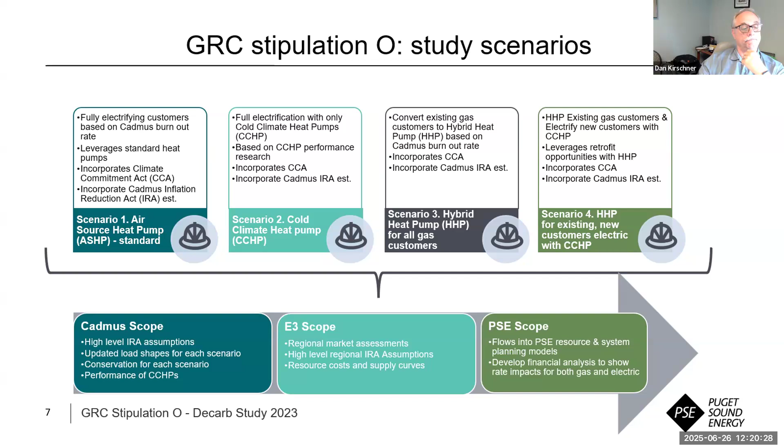Okay, I'm going to go to the next slide. There we go. For those of us that may be more in tune with an integrated resource planning process, the slide is a little helpful just to show how all these different inputs flowed through the analysis. So on the top left, you can see that's PSE service territory. And again, this is really PSE's responsibility areas. So our gas only, we did not include those electric utilities in this analysis.

That was produced by Cadmus. Those flowed into all 4 of our planning models that you can see on the screen. On the bottom left, that's the Pacific Northwest, that regional electrification view. Again, that came from E3, and that was incorporated really at the supply side for the gas and electric portfolio. It's also worth noting the gas and electric portfolio models, which are your integrated resource plan. We're leveraging the 23 gas integrated resource plan and the 23 electric progress report.

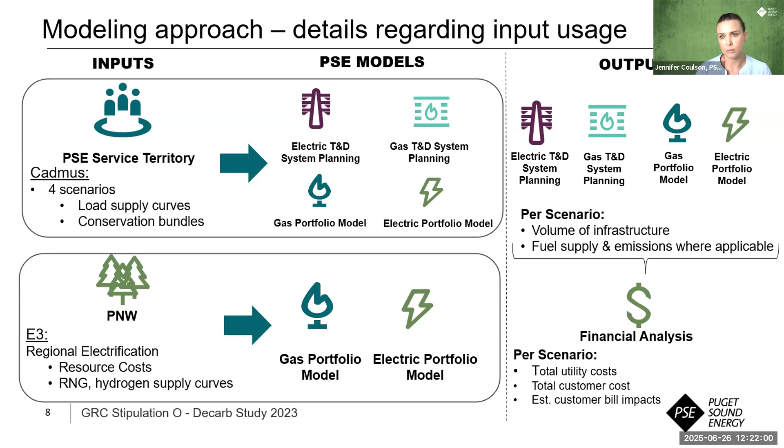This is important just because the assumptions that were used in those filings are the same ones. We're just changing these components that I'm calling out specifically. So if you happen to follow that closely, you would know there's various assumptions there. And the outputs is a volume of infrastructure and investment and fuel supply and emissions across the board. And again, we were able to pull this together into a utility cost view, but also look at the customer bill impact from a heating perspective.

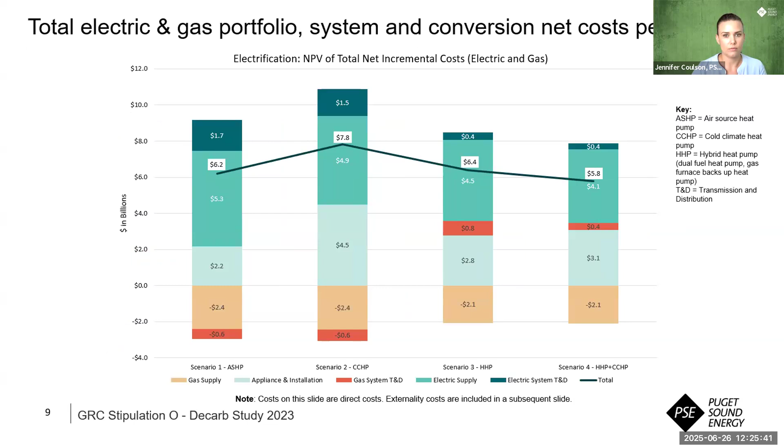And then I do have another question on slide nine, which is just to confirm the costs on slide nine are for Puget Sound Energy's electric territories. Is that correct? That's correct. So all of PSE's electric. This does not include Tacoma or Seattle or anyone else. Okay. Thank you.

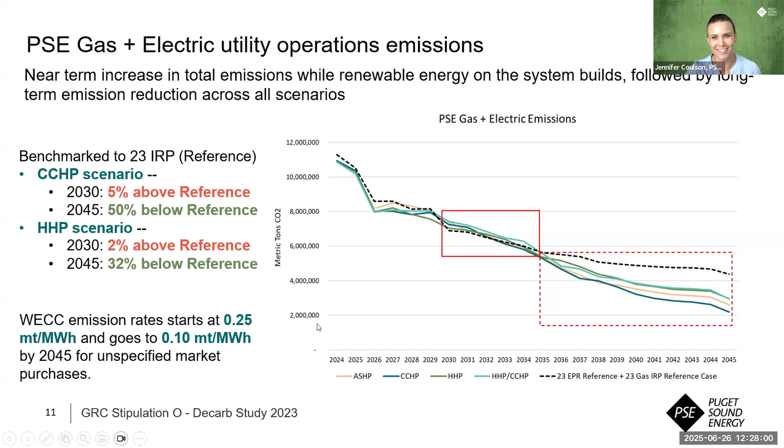Okay. I'm shocked. I usually get questions about this one. Maybe that'll come later. Type them into the chat, right? It's a lot different there.

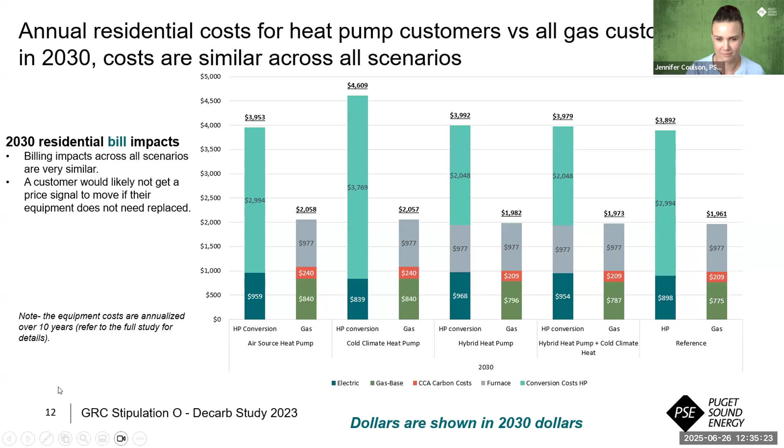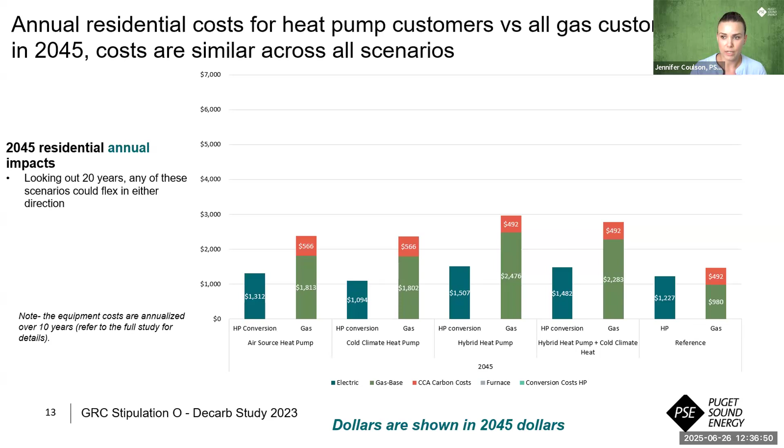Then you have the Climate Commitment Act carbon costs on the gas bill. So this is the impact of that. And you can see if you're just looking at the energy, you would definitely be getting a price signal as a customer to convert from a gas furnace to an electric heat pump at that later point in time. And the reference case on the far right, you can see is a little bit higher as well. The furnace costs on top of that, as well as the heat pump costs, and then the total costs.

And this was interesting in the hybrid heat pump perspective, because in theory, the hybrid heat pump makes a lot of sense for a gas utility, right? You're reducing that peak need. But from a customer perspective, when you're looking at the all-in cost, because they have to buy the furnace and the heat pump, and you can see that's trying to be reflected in that third column there, you're still spending more than you would if you just purchased the standard heat pump, which was interesting. And we hadn't really thought of it that way previously.

What's also interesting is that the reference case over here on the right is really close to the air source heat pump on the left. I think the investment in the renewable infrastructure on the electric portfolio side is quite large and it's pretty costly. And there's a need to get the renewable capacity resources there as well to ensure that the system is reliable and safe. And it's interesting that even in that scenario, you're spending just about the same in both of those versions, but you're not getting the same carbon reductions per se on the gas side. Any questions on this?

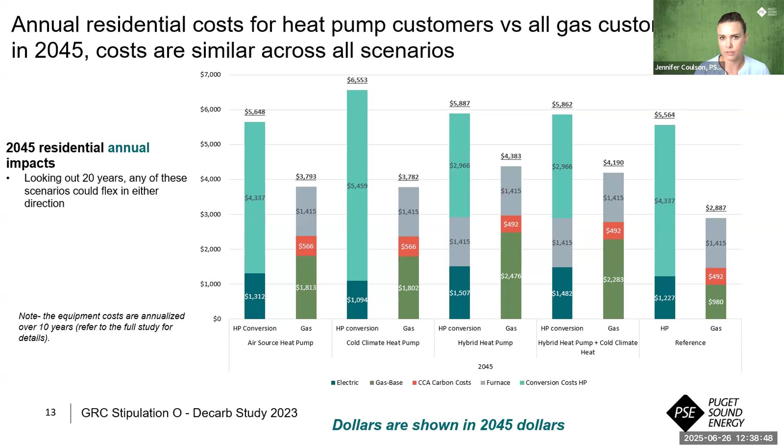Oh, and I guess on the cold climate heat pump, the investment of some of this work here is a lot more, obviously, than the air source heat pump. And what we found was those mild temperatures really didn't pay off from the energy use. So you got not even $300 difference in the electric bill between the two, but then that additional $1,000 for the equipment. So it doesn't really seem to pan out for customers in our area specifically, I guess, with the assumptions in this study.

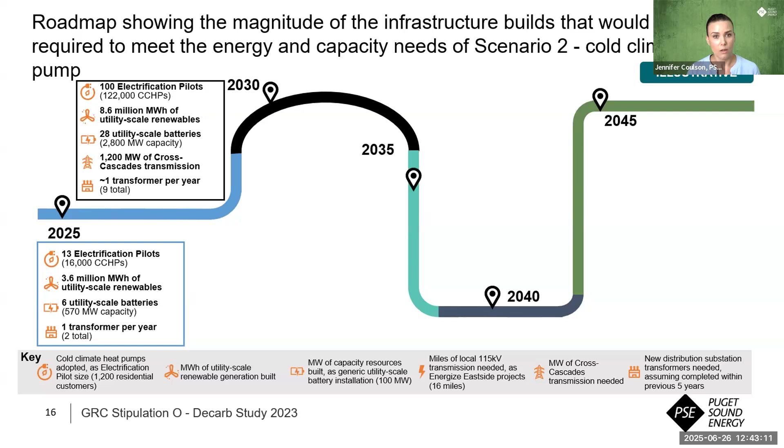When you get to 2030, you're bumping up pretty significantly to 122,000 customers. And this is where we see that regional transmission show up. So we got about 1,200 megawatts of generic cross-Cascades transmission. You can see that we're still adding a transformer a year, so we're at 9 by that point in time. And our capacity need goes up significantly to 2,800 megawatts.

And as you go all the way across the screen until 2045, you can see that our regional transmission needs go up to 4,600 megawatts. We need 5,800 megawatts of capacity and 62 transformers and 117 miles of local transmission. So it's a pretty significant infrastructure build, even with the cold climate heat pump scenario, which has the most peak reduction components because of that technology.

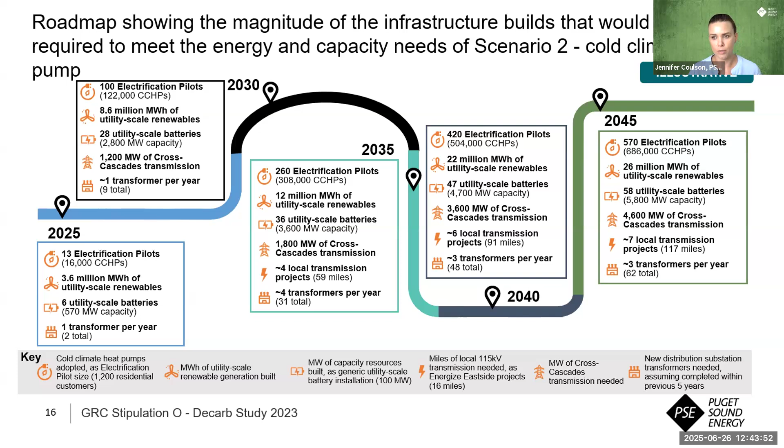So that's all I have. I'm back to my key findings. Again, we're incorporating this and updating assumptions and making improvements as we embark on our first integrated system plan, which has different requirements based on HB 1589 of how we're evaluating the scenarios. So those are pretty different regarding how much building electrification would be assumed in each scenario,

as well as the incorporation of varying electric vehicle forecasts and large load interconnection requests, such as data centers. We're going to continue that targeted electrification pilot into phase 2 to get more learnings from that process. But across the board, the emission increases are higher in the near term, which is interesting.

The costs are greater than the benefit to society. And the average residential customer really doesn't see much of a difference across the board because CETA is in there as well with those additional costs and that load growth across the region. Low-income customers, depending on their situation, transitioning them earlier in the process may not be the best. And then we do see benefits to targeted electrification in certain parts of the gas system, which would be continued to evaluate as we enter into this integrated system plan.

I kind of mentioned the timing of that HB 1589 decarbonization bill was about halfway through our targeted electrification strategy. So a lot of that work really is being evaluated in our integrated system plan.